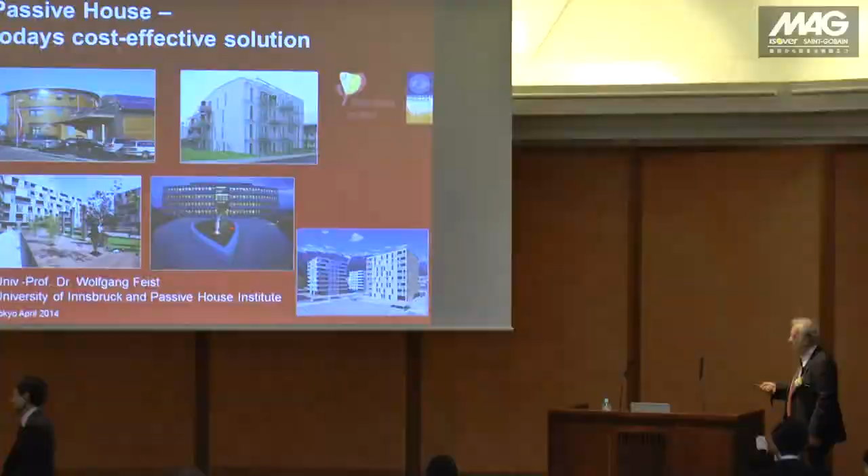I'm going to talk about the development of passive houses, which mainly took place in Europe. What you see in the first slide are some examples: passive house social housing projects built in Kassel and in Innsbruck, another project in Innsbruck, and passive house office buildings.

So there are already a lot of built passive houses which are being occupied in Europe.

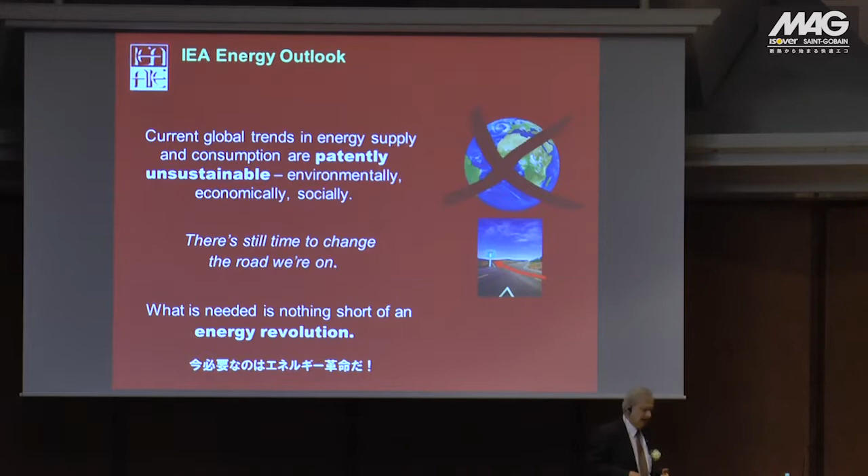This is information from the International Energy Agency, the agency responsible worldwide for research in energy resources and for looking at the development of energy worldwide. The IEA has always been in favor of the big industry model of energy—coal, gas, natural gas and oil. They publish what they call the World Energy Outlook every year, and there was a surprising result in the last one.

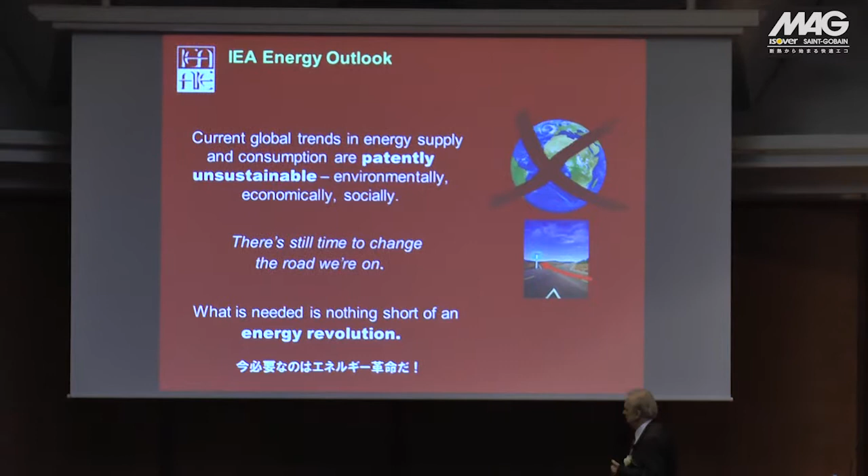This is what the International Energy Agency now tells us about the global trends in energy supply: they are patently unsustainable, not only environmentally, but also economically and socially. But they also say there is still time to change the road we are on, and what is needed is nothing short of an energy revolution.

So now let us have a look at how that energy revolution could look like.

In China they had energy supply problems all the time. In southwest China, all the region south of the Yangtze River, heating was prohibited, so people were not allowed to heat their buildings. But the comfort in these buildings was very poor—they suffered from very cold temperatures, down to 10 or 11 degrees during winter. So the government asked Professor Adamson for recommendations to improve the comfort in these buildings.

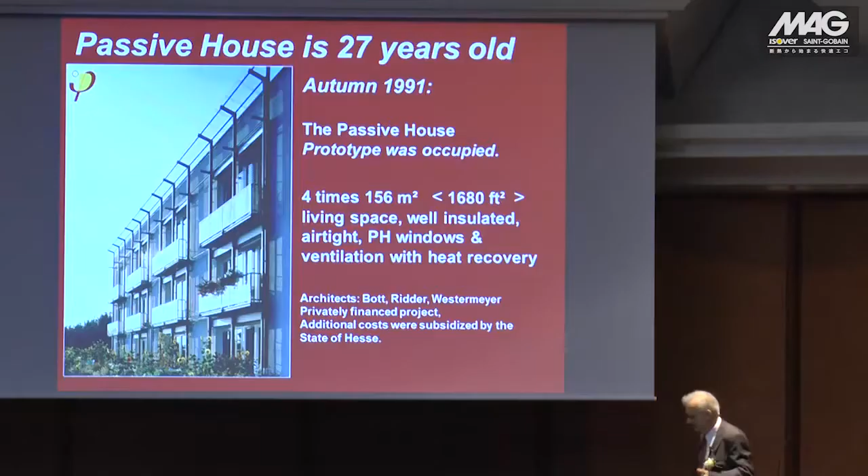So we made a theoretical study of how it might be possible to build passive houses in Europe. Professor Bo Adamson insisted that we not only do a theoretical study, but really build a demonstration building of a passive house in Europe. Now you have to know that in Europe the climate is like North Japan—it can be minus 15 degrees during winter. So it's not so easy to build a passive house in Europe. We had to use quite a lot of insulation, it had to be quite airtight, and we needed new hand-manufactured windows.

We put in a ventilation system with heat recovery. It was quite a big effort to realize these very first passive houses in Germany, in Darmstadt. What you see here is a typical German row house, with 4 units, each 3 stories, built by private investors. Families live in these buildings. This was built in 1991, and the architect of this development was Professor Bott.

Professor Bott, another colleague from the architectural department, later got a call from Stuttgart University, where he was teaching architectural arts, and that was the place where Miwa Mori was studying. So this is again some link to the Japanese development. This was the house being built at the

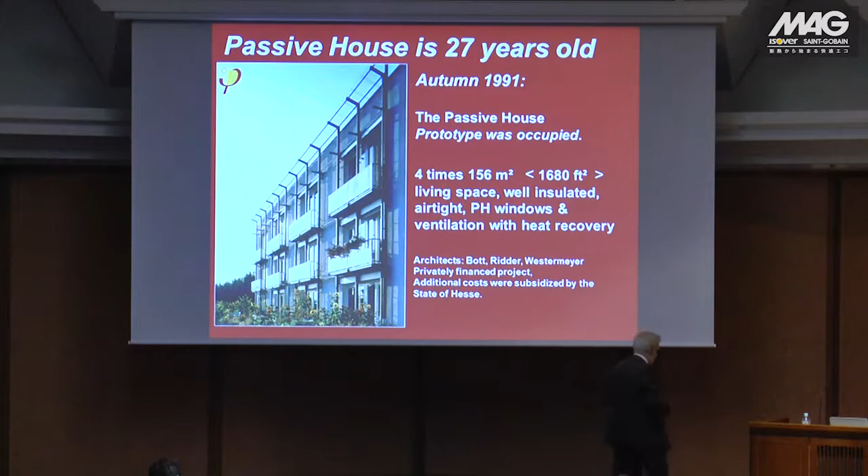beginning of the 1990s. The next thing we did, this was thought to be a research project. We wanted to know: will it be possible to reduce the energy demand of buildings in the cold German winter in a significant way? So we did that research.

We got some research money from a German state, the state of Hesse, to install monitoring equipment. We measured all the temperatures, we measured humidity, we measured the consumption of energy. And this is one of the most important results of that measurement.

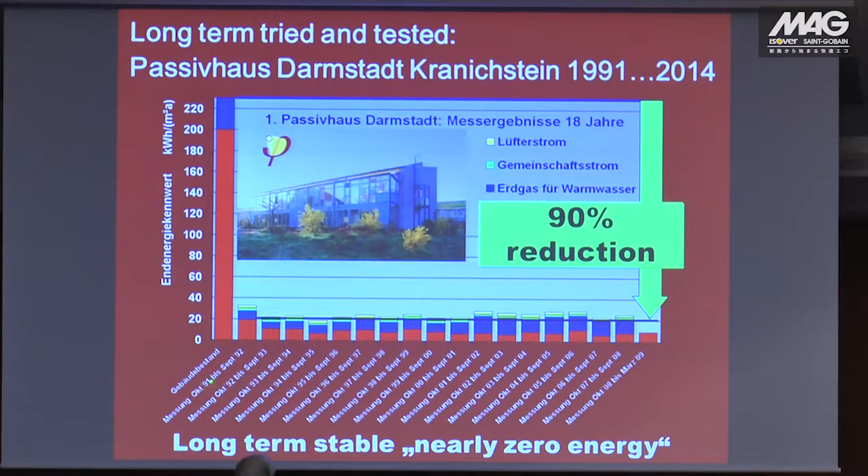What you see here is the years: 1991 to 1992, 92 to 93, 94, 95, 96. These are all the all-year consumptions, what is consumed in this building. Natural gas for heating, this is the red bar. Natural gas for domestic hot water. And this is the electricity for running washing machines and other things, and the yellow one for running the ventilation systems.

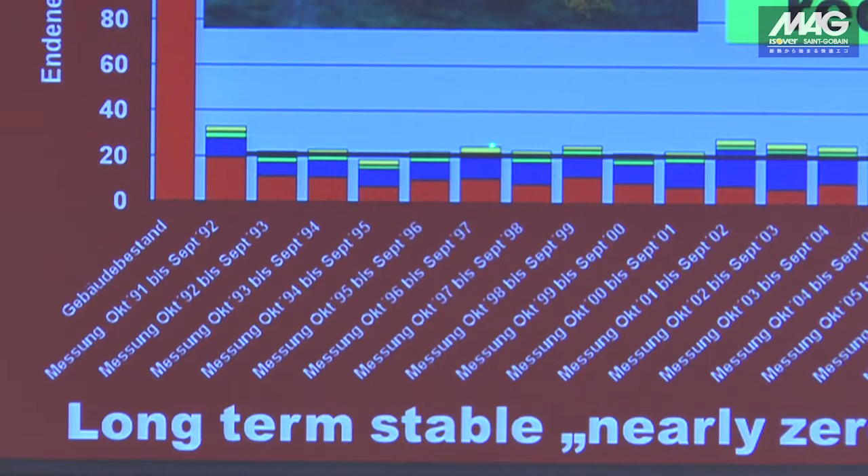So what you see here is that the total consumption of energy is in the range of 20 kilowatt hours per square meter and year, and the heating is even less than 10 kilowatt hours per square meter and year. Now we compare that with the average German consumption, what is normally consumed for heating in an average German building: 200 kilowatt hours. So this is down by more than a factor of 10.

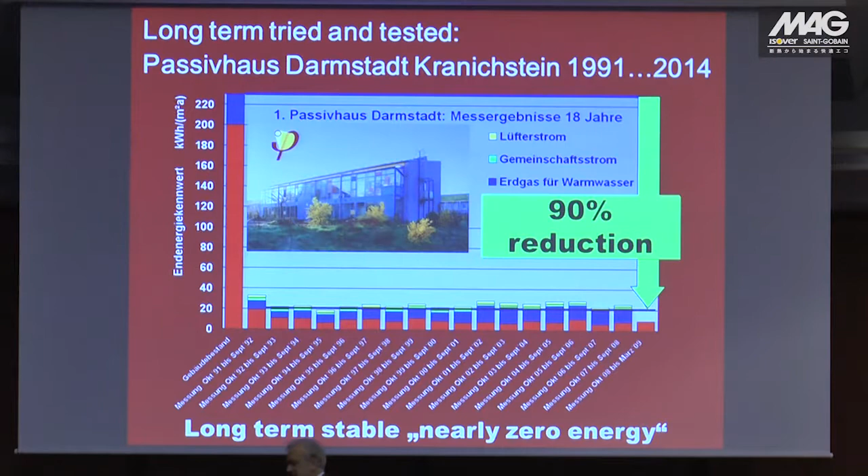So the whole research project was a big success. These results have been published, and then we had a very important guest from the United States of America. This is a guy you might know, he has been here at this university, I've been told, just a couple of months ago. His name is Amory Lovins. Amory Lovins came to visit us in this demonstration building.

After his visit, we were all sitting together having some afternoon tea, discussing the results. I was discussing with Amory, and at some point, well, you know Amory, he's a very energetic guy, and he told me, well, Wolfgang, you are completely wrong. So I was a little bit shocked. So now what's his opinion? Yeah, I'm completely wrong. So I was a little bit shrinking.

So what does he not like on this development? Well, Wolfgang, this is not just a research project. This is the solution. So I was very proud again.

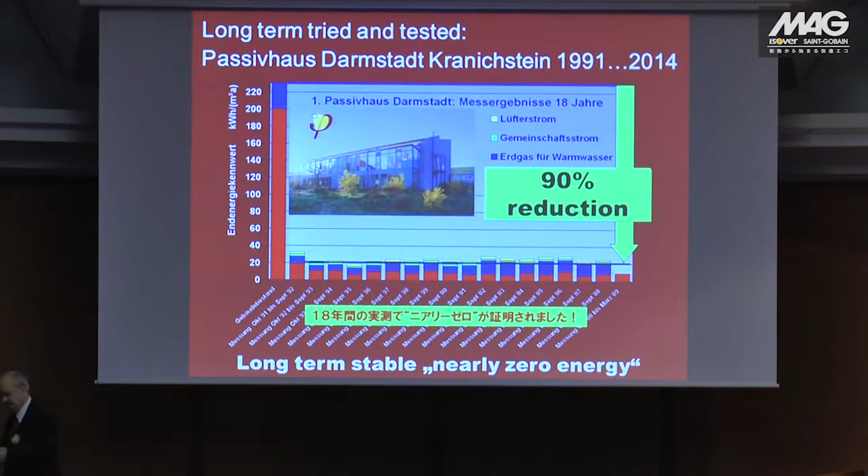He told us that now we should try to find producers to mass produce all these components which are needed in the passive house, like the insulation, the windows, the glazing system, the ventilation system. So all these parts needed to make a passive house work shouldn't be produced individually for each building, but in a big marketplace by different producers, and then the cost will come down, so with a reduced cost, it could be used everywhere. This was the idea of Amory.

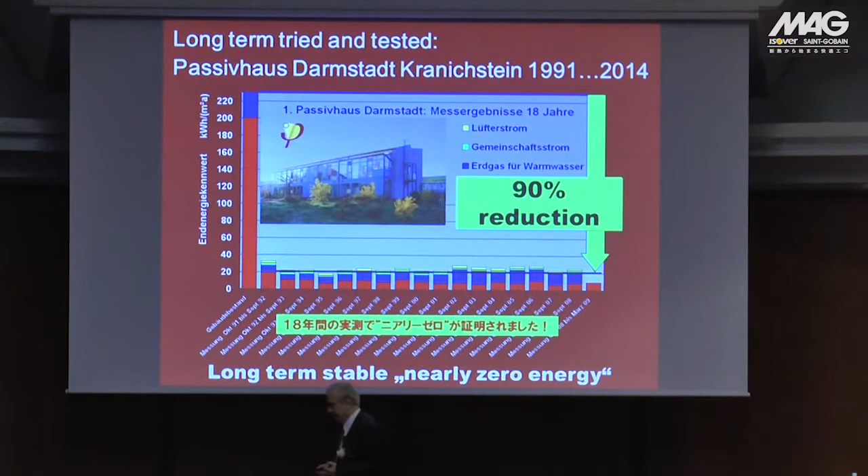And well, we started that. Again, we were able to convince the regional government, the Hesse government, and they financed a small working group of a few architects and a few producers in order to go on with the development of the so-called cost-efficient passive house. Well, and now I make a big jump. A big jump. We are now in 2013, last year, and I'll show you some examples of built passive houses.

This is what came out of the development. Now there are at least 50 passive house schools which have been built. A lot of social housing has been built as passive houses, because social housing has to be not expensive.

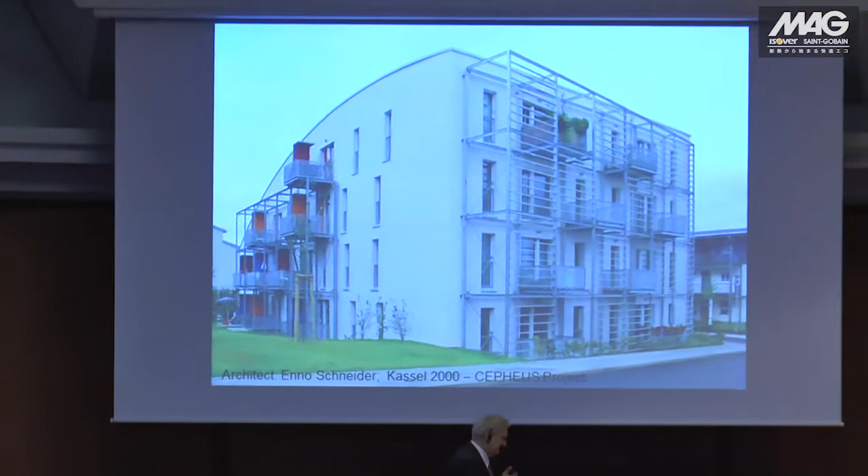So now you might be curious, if this is so successful, how does it work? I want to show you how this concept works using this example. This is another friend of mine, Professor Enno Schneider, an architect in Kassel. This building is the very first passive house social building, built in Kassel in the year 2000.

It's part of a big European demonstration project. The European Commission, which is the government of the whole continent of Europe, has research programs, and they started a program called CEPHEUS. CEPHEUS is an acronym for Cost-Efficient Passive Houses as European Standards.

And we have been working with the European Commission quite a lot. Now, when I tell you that the European Commission is somehow the government of Europe, you might be surprised, because who of all of you knows the European Commission? Yes, yeah, me, yeah, I know the European Commission. So how important is the European Commission? Well, it might be as important as the United Nations.

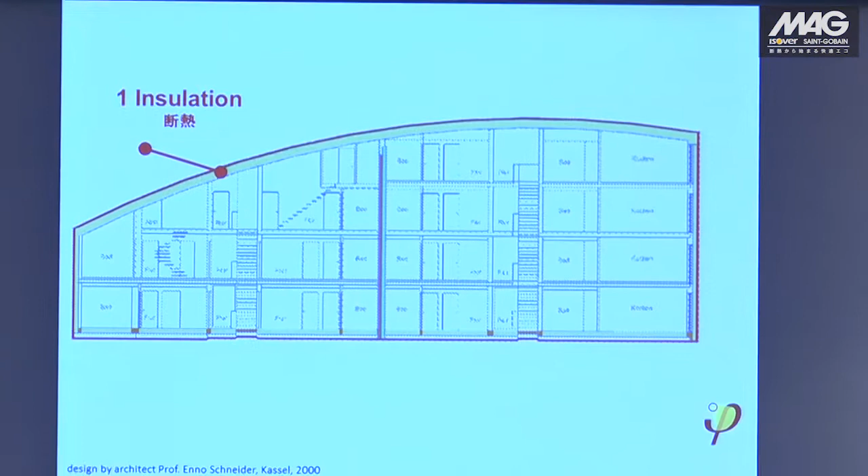So let's look at what the architect did in order to make this a passive house. Well, what we see first is insulation. It's a very simple thing to understand. If you want to keep your coffee hot, what do you do? Well, you fill it into a thermos bottle. This is insulation. You can keep the coffee hot without using any energy by filling it into a thermos bottle.

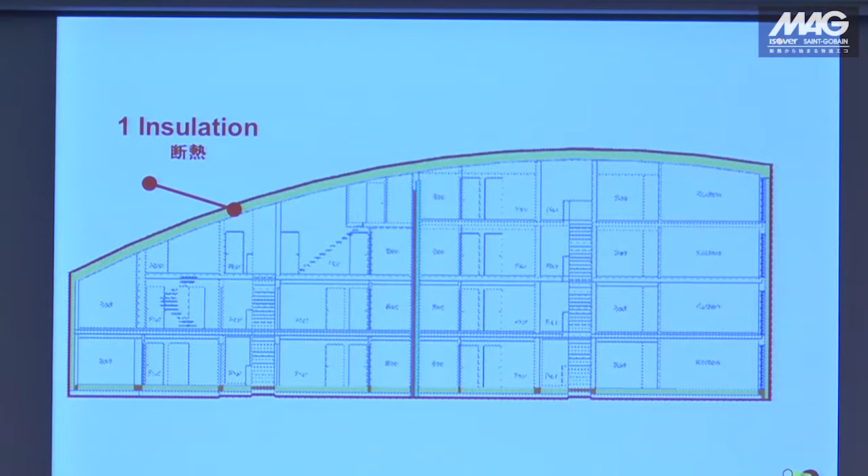And this is the principle of a passive house. You see, there are thick layers of insulation in the roof, on the bottom, in the walls. Everywhere there's not a window, we have very good insulation all around the building. So the building doesn't lose a lot of energy to the outside during winter time.

Now, there might be some questions some people ask: when you have that thick insulation, what will happen in summer? Will it be even warmer during summer because the insulation somehow is warming your house? No, that's not true. You have to think about it like a physicist thinks. If you want to keep your iced tea cold, what do you do? Well, you fill the tea into a thermos bottle, because the thermos bottle is keeping the tea cold. There's no energy going into the bottle.

So what is keeping you warm during winter is also keeping you cold during the summer. So the same material is useful for both the summer and the winter condition.

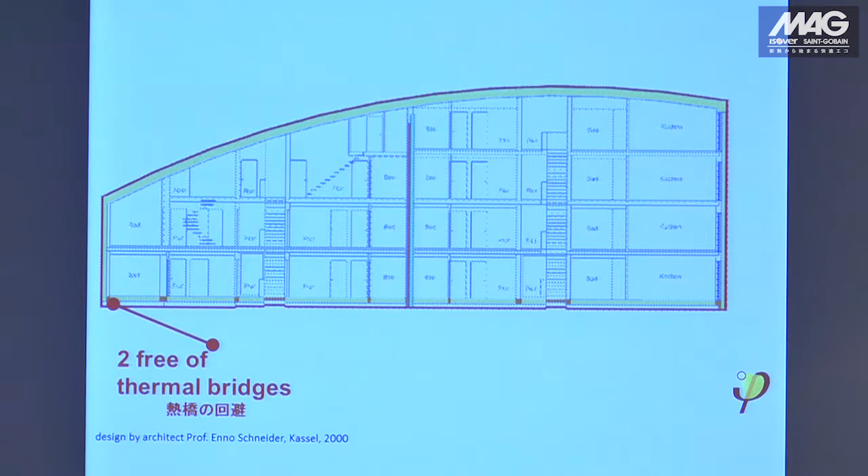Now, insulation is very important for the passive house, but it's not just insulation. We also have to be very careful that all parts are insulated well. There are parts of a building which we call thermal bridges, points where the insulation might be weakened by concrete or steel or other materials going through the insulation. So we have to reduce these thermal bridges. This is also part of the passive house concept.

The third part is the passive house windows. Now, what is a passive house window? It's a little bit dependent on which climate we are in. In the German climate, which is very similar to North Japanese climate, the optimal window is a triple pane window.

A triple pane window with two low-E coatings loses only a very small amount of energy, so we have almost no energy losses, but we still have energy gains from solar radiation. This triple pane window is the best solution for moderate cold climates.

If we go to even colder climates like northern China or Siberia in Russia, we need even better windows. The best available windows nowadays are vacuum insulation windows, using the technology of the vacuum flask for the window. But in northern Japan, it's still a triple pane window.

If we go to the south of Japan, where it's very hot and you mainly want to protect from too much energy during summer, a sun protection glazing is the best solution. So the kind of glazing you use is different depending on the climate you are in.

So that is the passive house window. Now, of course, the building envelope is not only insulated, it also has to be airtight.

Well, why? You might have seen this, and it's very easy to realize, especially in hot and humid climates. During summer, in old houses, you very often have a problem of mold growth inside the building structure, because humid air infiltrates through the structure and there might be condensation, which causes mold growth and structural damage to the building. This is why a building envelope has to be airtight, in order to avoid structural damage.

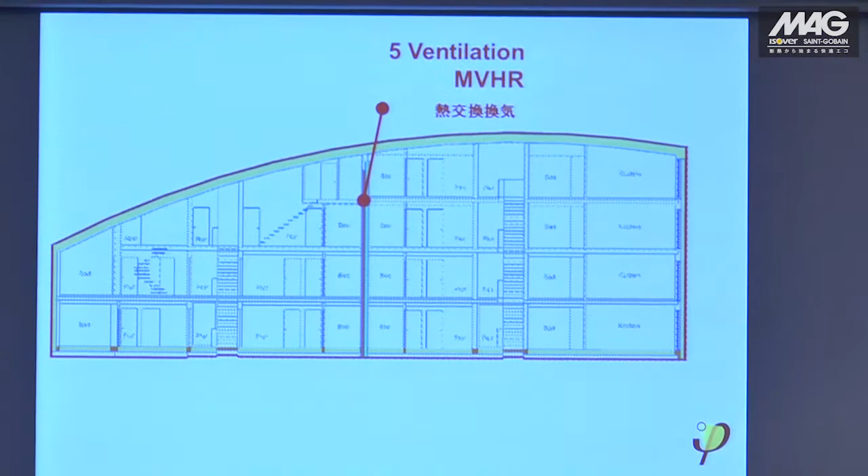There is a fifth point: people in a building need fresh air, so it's not an option to just seal up the building to make it airtight. We need fresh air in the building. So fresh air is provided by ventilation with heat recovery, MVHR, or as it's pronounced in America, the heat recovery system. Fresh air is delivered to the building and exhaust air is removed from the building — mechanical ventilation with heat recovery.

So these are the 5 elements of a passive house, and they are the same everywhere. These are the same principles used to build passive houses, which are very successful. The surprising thing is that these are the only 5 points — nothing else. It sounds too easy to be true, but it's just 5 well-known elements: insulation, better windows, airtightness, reduction of thermal bridging, and ventilation with heat recovery. It's a very simple principle, and that's the surprising thing — it really, really works.

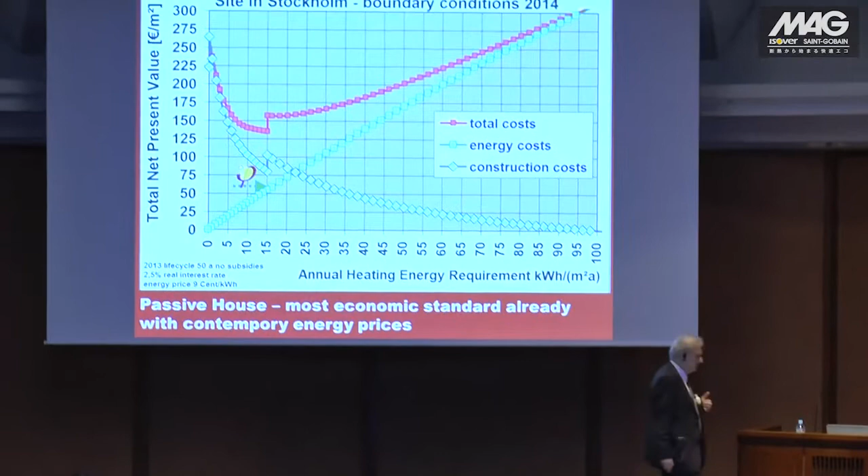Now there's a lot of discussion about cost. I've heard it's also discussed in Japan — we talked about it before the symposium — that there are lots of people who think passive houses have too high an upfront cost. Let's be honest about these developments with cost.

What I have here is the amount of energy needed just for heating the building. Let's look at heating for now. You can have 100 kilowatt hours per square meter per year, or you can build a zero energy building which doesn't need any heating at all — that would need about 1 meter of insulation. Now, to reduce the energy you need, you have to improve the insulation — maybe 5 centimeters, 10 centimeters, 30 centimeters, or up to 1 meter of insulation.

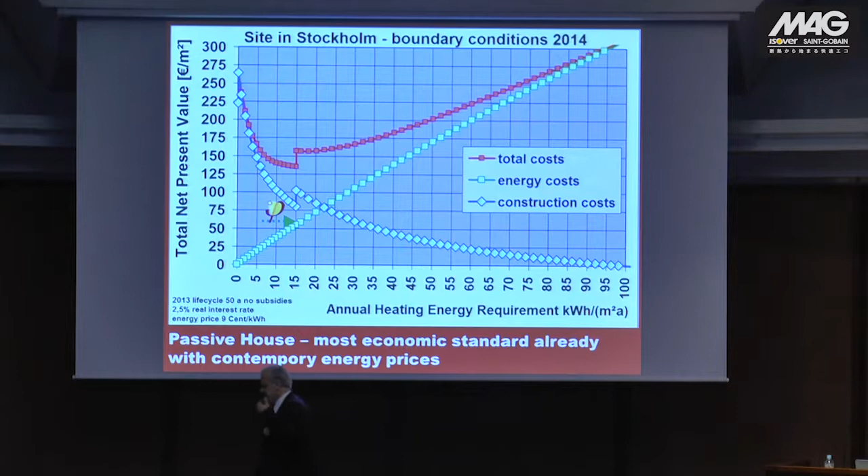So the overall cost for insulating is increasing. This isn't just the cost for insulation — it's also the cost for the windows, the ventilation system, everything included. So the costs increase a lot. What you see here is that a zero energy building, one that doesn't consume any energy, might not be a good idea because it's really very, very expensive.

But on the other side, building a poorly insulated building has its own downside: the heating cost. Here we have the heating cost — of course it comes down as insulation increases. We have the highest heating cost with a less insulated building, and zero heating cost with a zero heating energy building. This is the total amount of heating cost over the whole useful period of the building, calculated the way a bank manager would do it.

So it's calculated by calculating the so-called net present value. There might be people in this room who don't know what a net present value is.

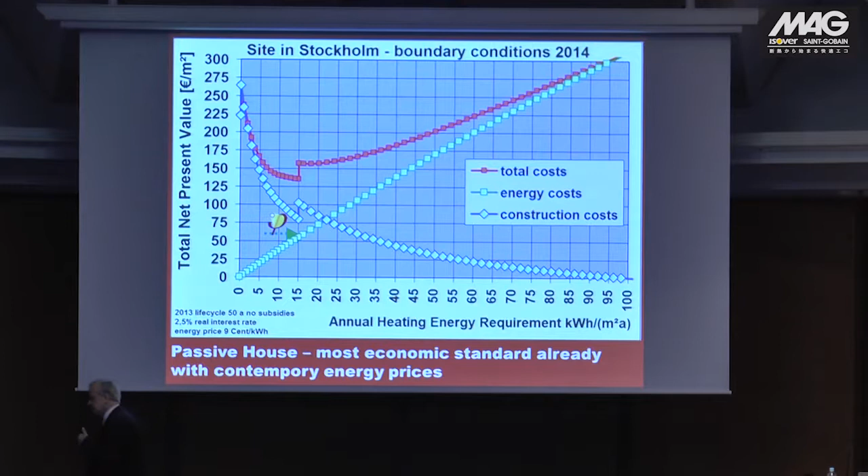Just think of it as the total amount of cost you have for paying for the energy. It's what the financial sector uses for comparing costs which occur at different times, so the costs in the far away future.

You don't care so much about the cost you will have in 20 years. So these costs are not as valuable nowadays, they don't have such a high net present value as what you spend now.

So this is added up exactly how the financial sector does it. This is the green curve, the net present value of the energy cost.

Now there are no other costs, well there are costs for say maintenance, yes of course, but the maintenance costs are about the same in both cases, whether you insulate or not.

Even the maintenance cost might be lower in a well insulated house, but we won't take that into account now. Now these are all the costs, so we can add them up.

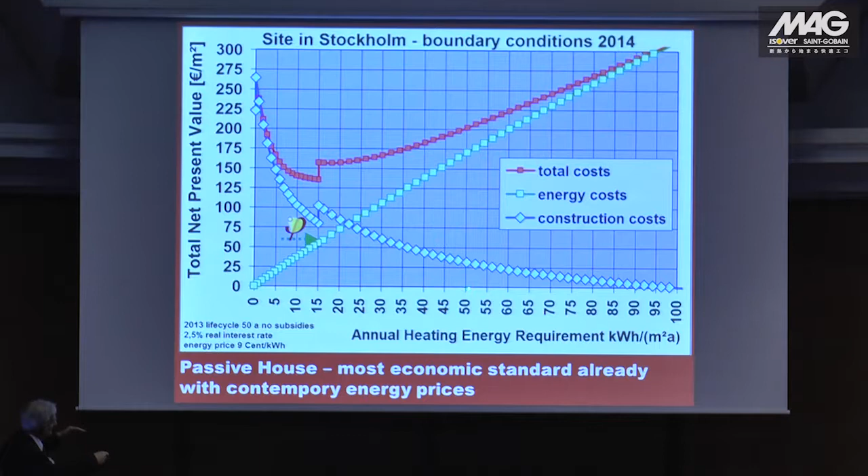We add the investment cost and the energy cost, and what you find is the red curve. So the red curve, this is the total cost.

This is what somebody who is a resident in this building will have to pay. That is the total cost of occupation in that building.

And what you see now is that there is a minimum. And this minimum is exactly the minimum of a passive house. So the passive house is at the minimum of total cost for the overall spend in such a building.

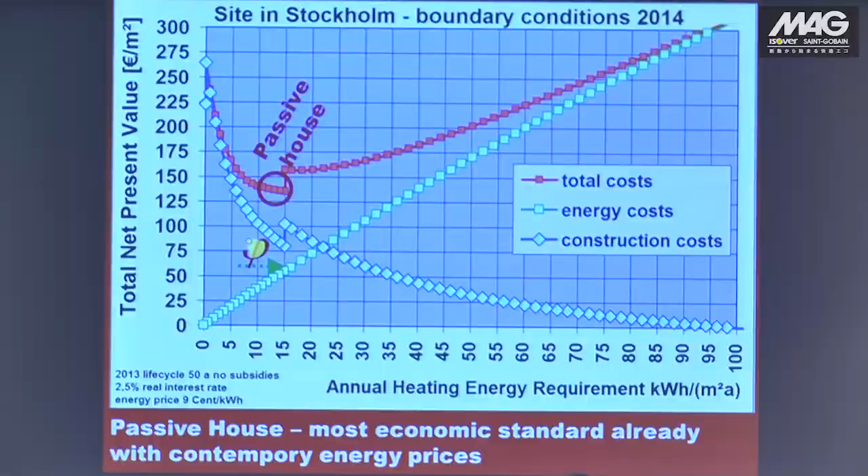And this is quite easy to understand also for all those who are going to build new buildings. This is the best way to do the investment you take. You'll have a loan, you will pay interest for that loan.

And you can compare the paid interest and the payback with the energy you are saving. So this is why the passive house is a very attractive solution, because it's the least cost solution for building new construction in Germany nowadays.

I'm coming back to the 5 points. What are the important design methods for building a passive house?

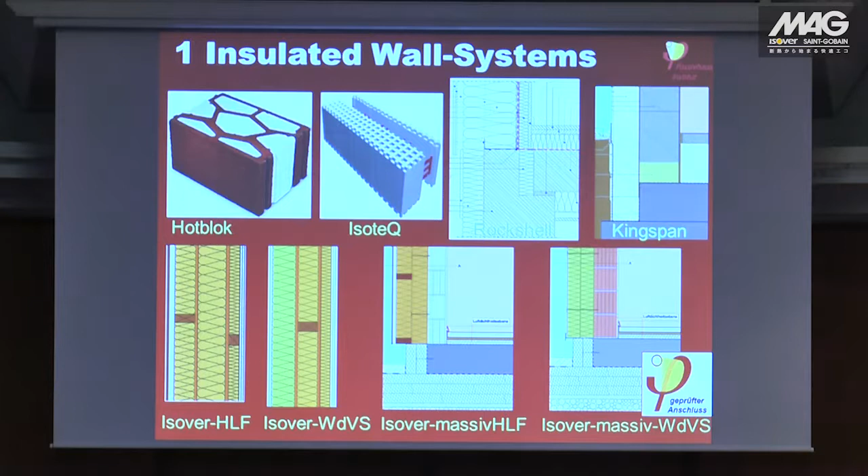I come back to what Amory Lovins convinced us to do. Nowadays we have a lot of different producers who offer passive house construction systems in Europe.

So this is a type of just a simple brick, insulated brick structure, which is distributed by the brick industry. So the brick industry has passive house bricks. This is a method you can use, concrete structure, in order to build passive houses.

It's a so-called insulated concrete form, ICF in America, very popular. So you build, this is like Lego, so you build your building like with Lego stones.

And it will be filled with concrete, and these are the forms, and the forms will be kept in place, so they are not removed, they don't have to be removed from the site or destroyed.

So this is also environmentally quite an interesting development. There are lots of other producers who produce these passive house elements.

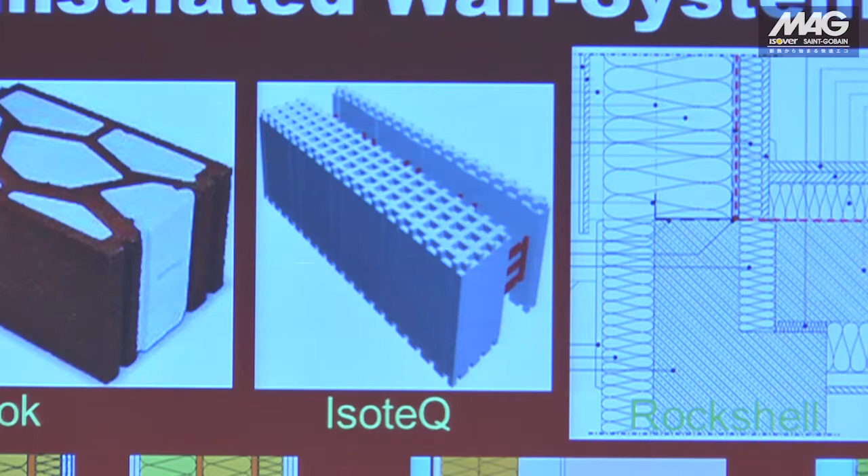This is another construction type which is much more popular in Japan, that is timber construction. So there are different ways of timber construction filled with insulation material.

So one type of insulation material you can use in passive houses is the glass wool insulation or mineral wool insulation. There is a probe you can see in the exhibition outside, produced by Isover, by the firm MAG.

Which has been helpful in organizing this event also. You can also, of course, use other types of insulation.

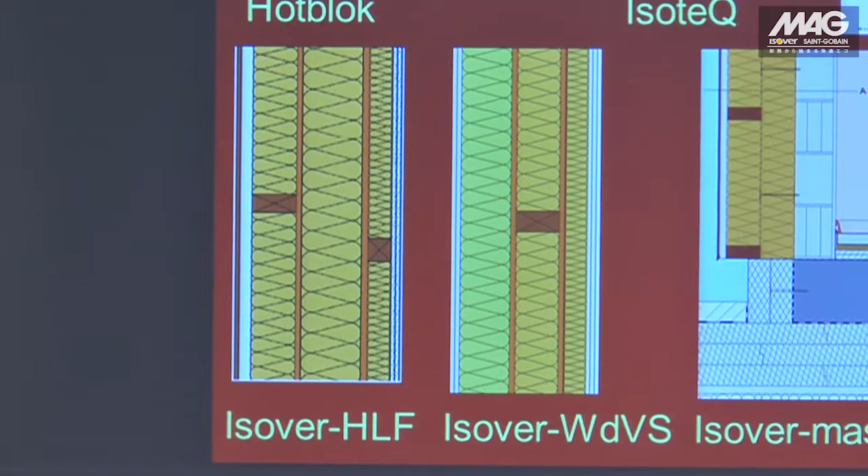There are lots of different types of insulation available. What we have to keep in mind is that normal insulation material is mainly just air.

It's just air, what is insulating, like our clothes. It's not depending on what kind of material you use to keep the air from moving. If the air is moving, it's not insulating, it's convection.

So then this is a bad idea. The air has to be kept in place, and this is where the insulation material comes in. So these are the solutions which have been created for the structure of a building.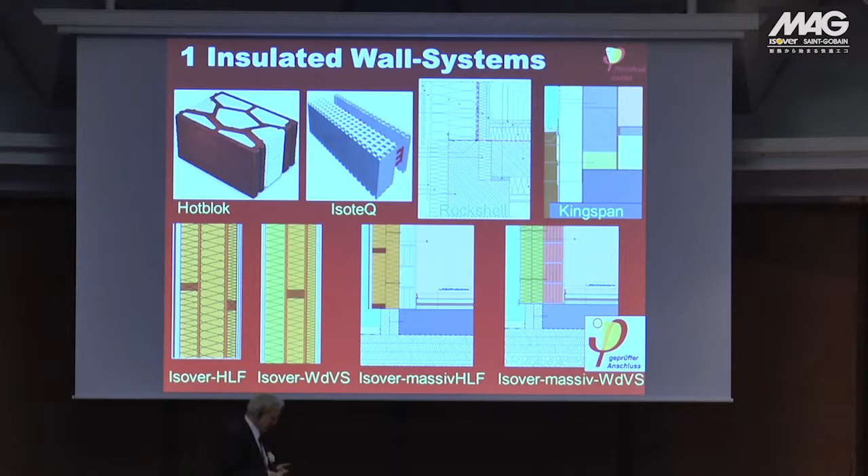Now there are already more than 100 producers in Germany. This is again what the speaker before me told you. This is a big development of small and medium enterprises providing materials which save energy. So this is a big shift from big industry - oil, gas, coal, and nuclear - to small and medium enterprises who construct energy-efficient buildings.

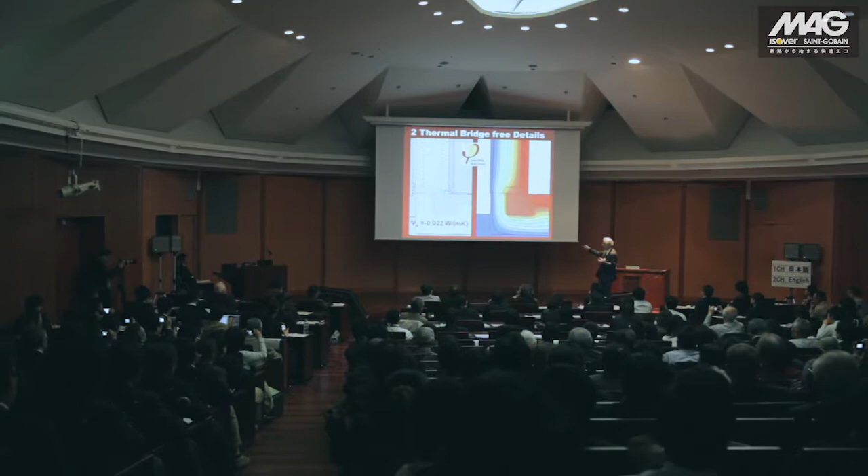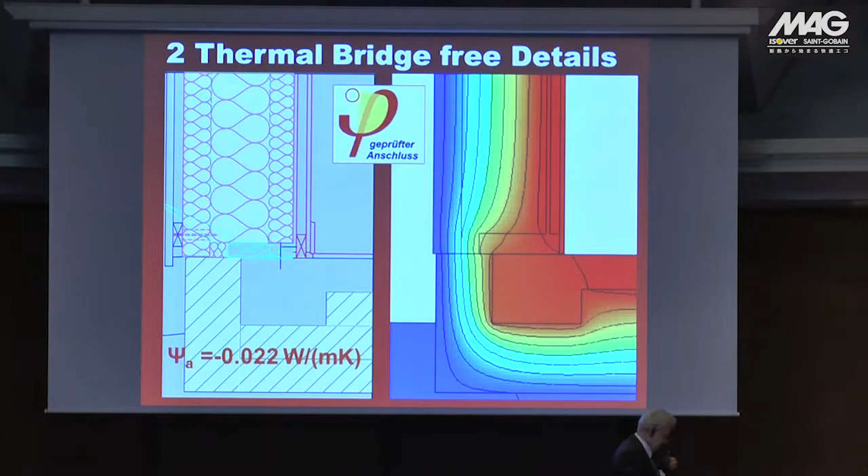So what is our role in this? We help these producers design their solutions. This is a type of timber frame construction widely used in Germany. This has to be connected to the insulation of the basement. What you see here is a specific structure, how to make that join in a way that there is no extra thermal bridge. The thermal bridge is eliminated from the whole envelope, and this is possible just by using your brain. We are substituting energy losses by using our brain to construct better construction. This is widely being used.

Let's go to step 3. You remember, I showed you 5 points for construction of passive houses. Now we have seen insulation and reduction of thermal bridges. I'm going to show you the solution for windows.

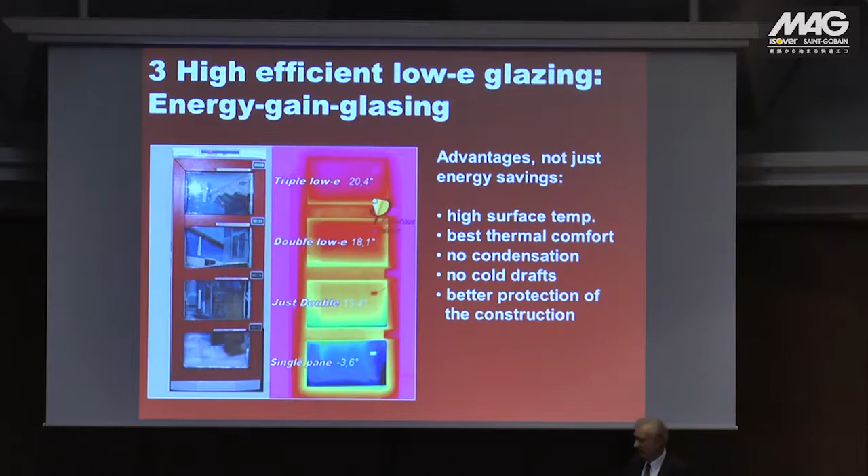Now we are in a cold climate. You see outside it's a winter condition with snow, minus 15 degrees. Inside it's 22 degrees. That sounds comfortable, but let's look at the window. This is a standard single-pane window, which will have frost on the inside with minus 15 degrees outside. It's not comfortable at all - if you put your hand on it, you will freeze.

A not very comfortable solution. The next step was to just add another pane, so we are at a double pane window, which is better. Now the temperature on the inner side is higher, above frost, but you still have condensation, and 14 degrees is still not very comfortable.

So the next step was that physicists brought in what is called a low emissivity coating. This is a very inexpensive industrial process to coat the window with a small metal layer reflecting infrared light - like in a thermos bottle. This gives a much better window, with a surface temperature in the range of 18 degrees. This was the type of glazing mainly used in new construction in Germany up to the last 5 years.

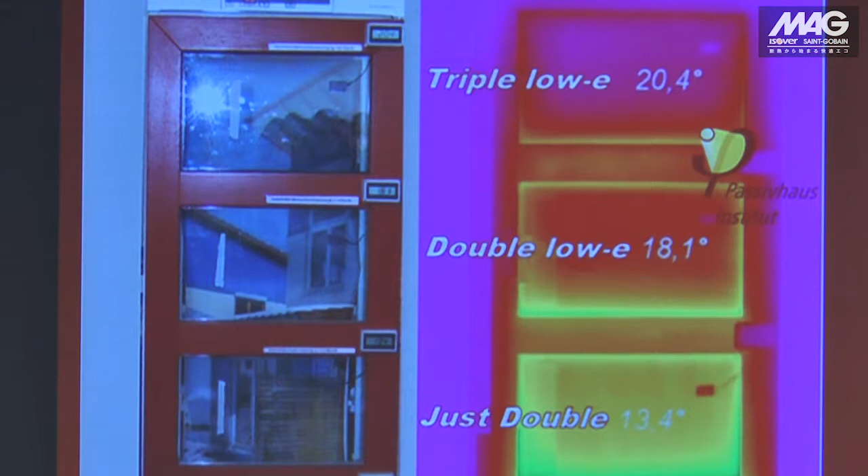Up to 2009, 2010, this type of double low-E window was the mainly used window in Germany. And what happened then? Now 70% of all glazing used in Germany, in new construction and refurbishment, is already triple glazing. Triple glazing, you just add another pane also with a low-E layer, and now we are down to a very low heat loss and up to a very comfortable surface temperature.

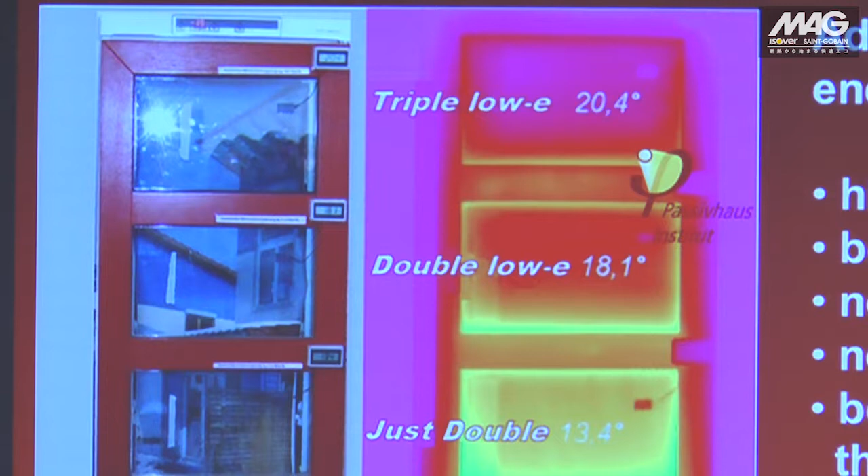If you put your hand on the surface, it's 20 degrees - as warm as your desk. This is not cold anymore, a very comfortable situation. The prices of triple glazing have come down very much in Germany, so nowadays it doesn't matter. In some parts, if you want a double pane, it will be more expensive than triple pane, because triple pane is now the standardized mass product solution.

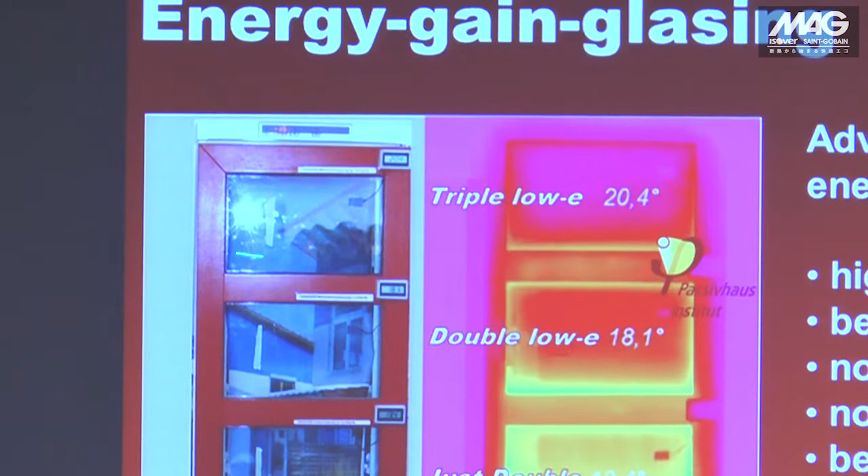So Amory Lovins has been exactly right. If you go to produce these elements as the normal solution, it's not going to be expensive. And this is what happened.

Now it's not just the glazing. The glazing is produced by centralized industrial fabrication, like the company Saint-Gobain, for example, which produces glazing. But there are others like Pilkington and Schott Glass - lots of producers of glazing, but it's produced in a centralized factory. What is locally produced is the frames, like this typical German wooden frame which has been used most of the time.

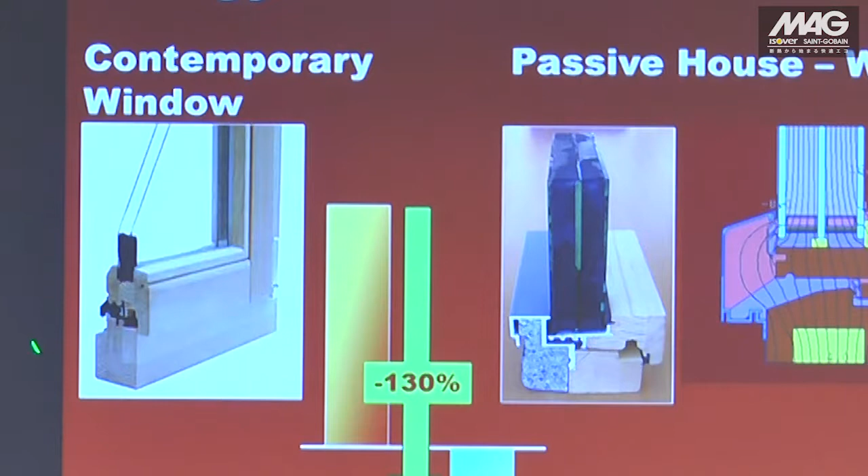So if you have this old window with a normal frame and a double glazed pane, it is a heat loss window. We have a lot of energy losses from the window.

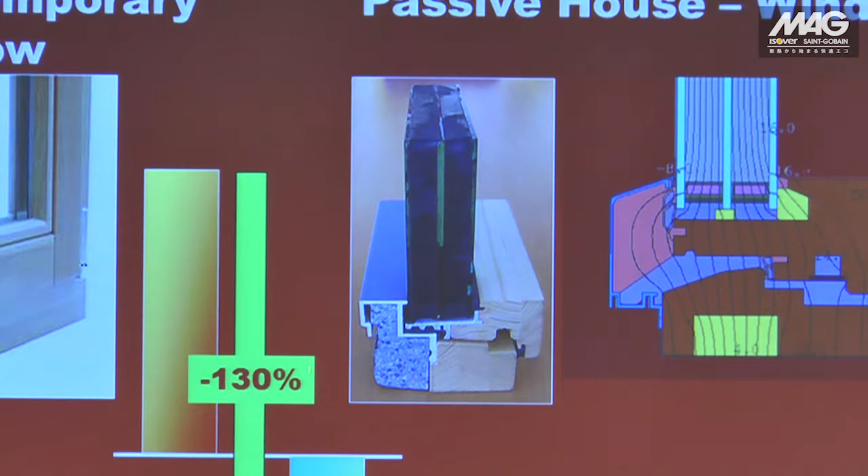Now, what we did in the development of the passive house sector, we moved the frame around, so now it's positioned in a way that's much slimmer than the old one. We added some insulation on the outside of the frame, so now this is a very well insulated frame. And this is a triple pane glazing with a thermally insulating spacer. So what we get at the end is a window where it's no longer a heat loss window, it's a heat gain window.

We get more solar energy into the room by penetrating through a window from the outside with solar radiation, so that the room gets heated during winter by the solar energy, and the heat losses are smaller than the heat gains. This is what took place in the passive house revolution, part of the energy revolution in Germany.

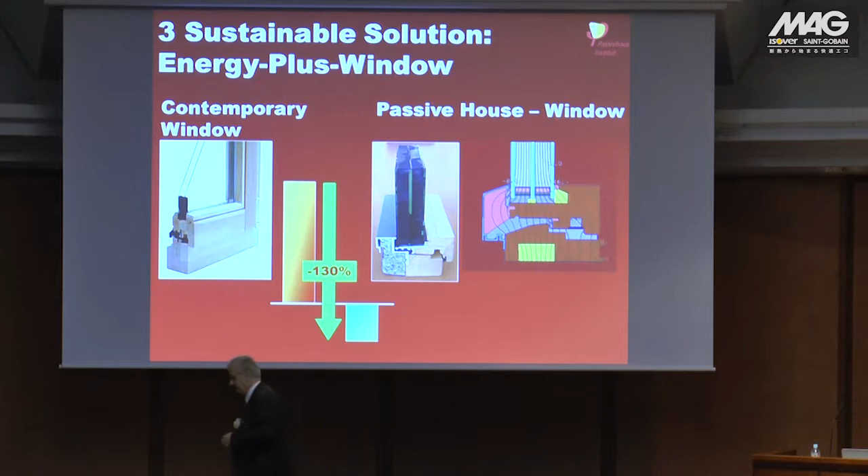So this is going to be the window of the future, and hopefully when I'll be here next in Japan, that's a condition - I'll come back to Japan only if there is a Japanese-produced passive house window. We'll need a passive house window from Japanese production.

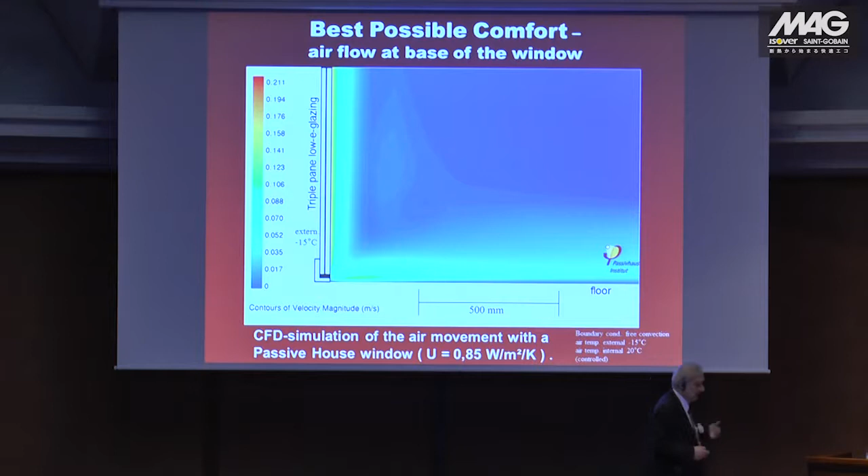So there's another advantage to these better insulating windows. The window has a cold surface, so at the cold surface of the window, the air is cooled. The cool air falls down along the window and distributes on the floor, so you get cold feet. You might know that from your home, that there is cold air coming down. Now, if we have a passive house window, the temperature here isn't very low, so you won't get any cold feet any longer. So the comfort in a passive house is much better than you are used to in standard buildings. It's another advantage.

So now I'm coming to point number 4. I won't talk a lot about airtightness because I already told you what is important, why we need a building envelope to be airtight - it's mainly to avoid structural damage. I'm not going very deep into that. But the next step is what always has been a discussion everywhere.

Why do we need ventilation? We have a lot of emissions in a dwelling, and it's also us - we give off smells and humidity, and there's a lot of activity going on in a room where people are staying. And this is the reason why we need ventilation.

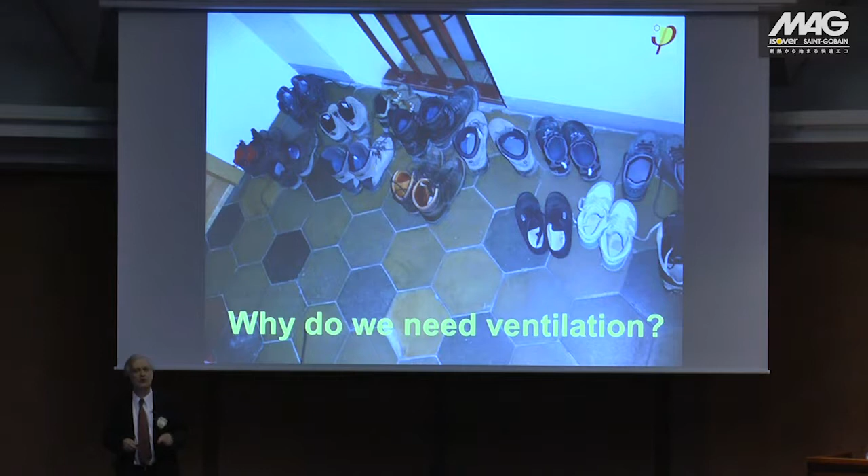So ventilation is clear, it's for indoor air quality. This is the main issue of ventilation. Ventilation is about indoor air quality. And I say it again, ventilation is about indoor air quality. It's not about energy. Yes, we can also improve ventilation in order to save energy, but that's not the important thing. The important thing is ventilation is for indoor air quality. This is why we need ventilation.

And this is how it's done. We have fresh air - this is air coming from the outside - and the fresh air is distributed into each dwelling. So now let's look at that dwelling. This is fresh air which is ventilated into the room. We have the same thing here, of course - in this room where we are sitting, in this conference hall, there are fresh air supply outlets because we need fresh air inside here.

So this is distributed to the living room, to the bedrooms, to the working rooms, everywhere where people are staying. And then there is the stale air, the air which is coming from the kitchen, from the bathroom, from the toilets, maybe a workshop or whatever. We remove the air, we extract it from these rooms where we have the poorest indoor air quality and bring it back outside. This is how ventilation works: fresh air in, stale air out.

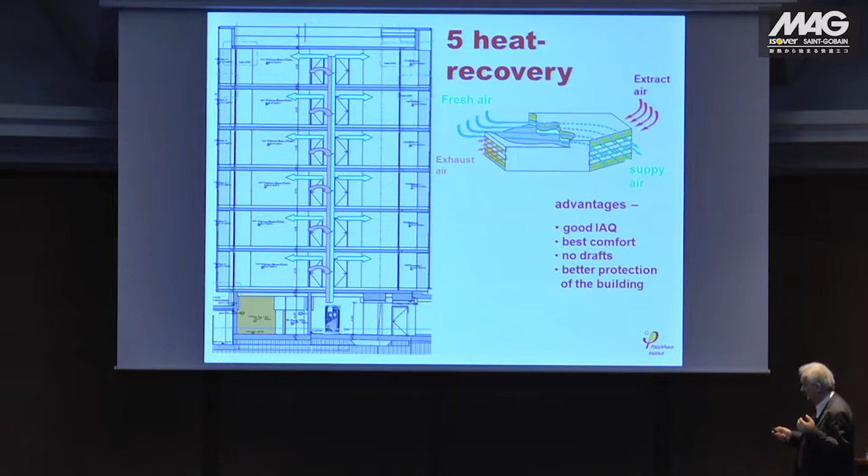Now the only trick with passive house ventilation is that we put in something which we call a heat recovery system. How is that working? Well, this is what you see here. This is the extract air, the warm air coming from the kitchen, from the bathroom, from the toilet. We bring it through the heat exchanger, and it's removed outside of the room.

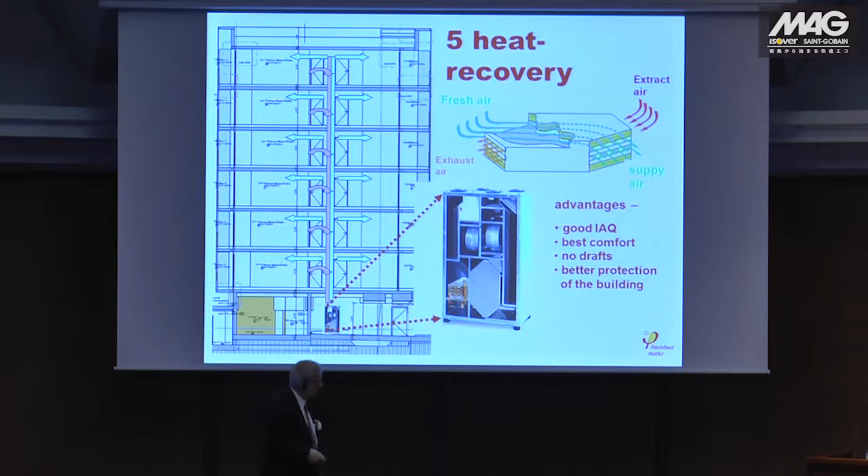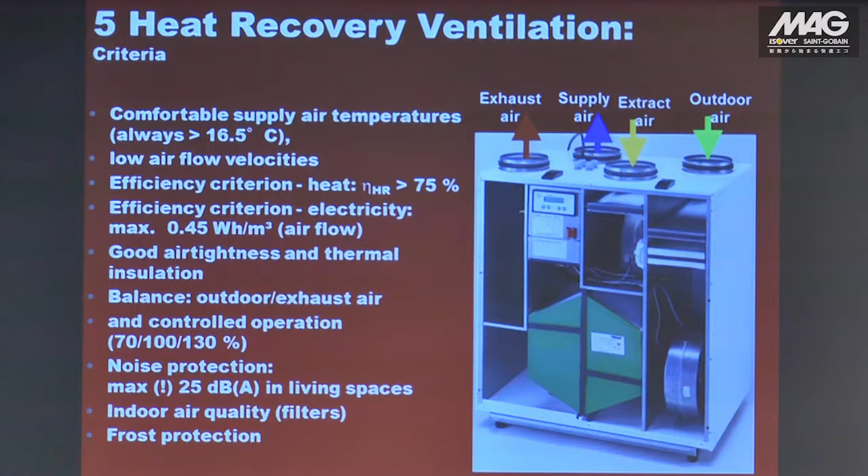Think about a piece of paper between the cold, fresh air coming in from outside and the air supplied to the inside. These airflows are not mixed up - there's no return air, only fresh air from the outside. But we exchange the heat from the warm air to the cold side. With modern heat exchangers, we can have efficiencies of up to 90%, bringing back 90% of the heat from the stale air to the fresh air. This is such a type of heat recovery ventilation system.

Remember what I said - ventilation is about indoor air quality. So there are a lot of issues such a system has to account for. They have to provide good indoor quality, so they shouldn't smell. There have to be filters so you don't bring dirt into the room. These ventilators don't have to produce a lot of noise - it has to be quiet because you don't want to hear something all the time. So there are a lot of criteria for this system.

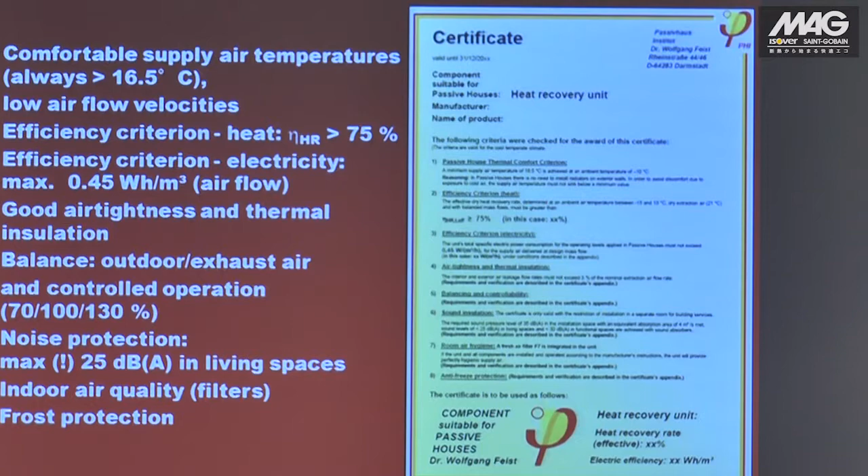This is another area where our institute is engaged - we do certification for these kinds of systems. You can get a certificate, and in this certificate you find all the numbers: how high is the efficiency of the system, and if you install it in your building, it's the installed efficiency. This type is 75%. How high is the consumption of electricity for the ventilators? What is the operating noise? You get all these numbers, and you can be sure that the product will meet these numbers.

So you can really use it in your dwelling in order to save energy and have good indoor air quality. So I'm now wrapping up - I have been talking about better insulated wall and roof systems. There are a lot of these systems now available on the European market, and yes, we need more of these systems, especially in Japan, we'll need a lot of these construction systems.

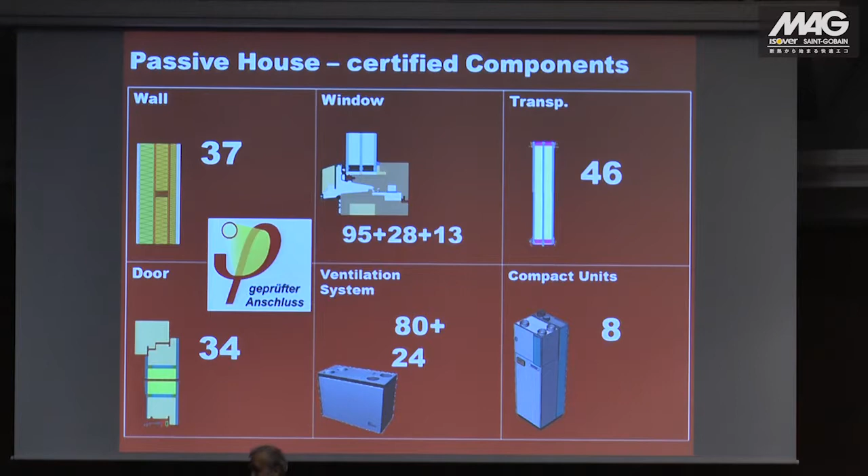The better windows - nowadays we have, this is an old slide, more than 150 certified window producers, most of them small and medium-sized producers. These producers can compete with the big plastic window producers in Germany because they have such high quality. This is a big chance for small and medium enterprises. So this is not only good for energy, not only good for changing the energy path, what IEA says, it's also good for the economy, because small and medium enterprises are the people carrying the economy. Those are the people who are innovative, who can help us grow the economy.

There are a lot of window panes available on the European market. I'm very proud to announce that now there is a first Chinese-made passive house window - there's a certification for a Chinese-made passive house window. And hopefully soon there will also be Japanese-made passive house windows available for the Japanese market.

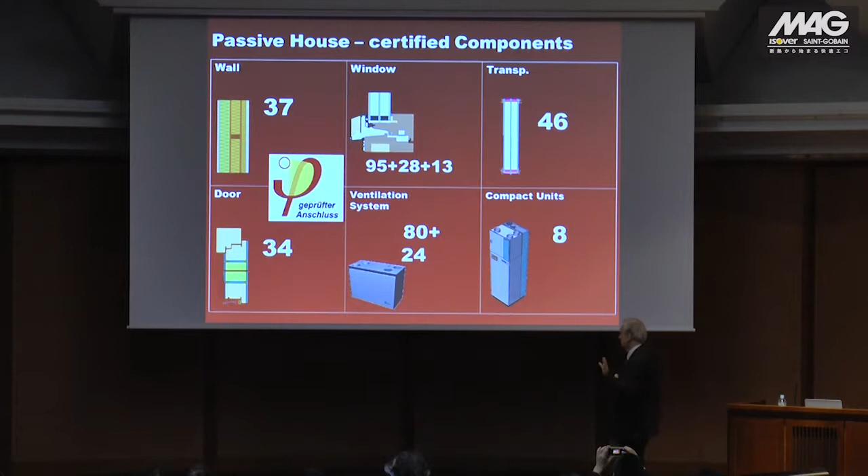We have these heat recovery systems - nowadays more than 100 systems have been certified. This is also a product which can be easily produced by small and medium enterprises. They use efficient motors which are constructed by mass production of bigger industry partners producing very efficient ventilator units.

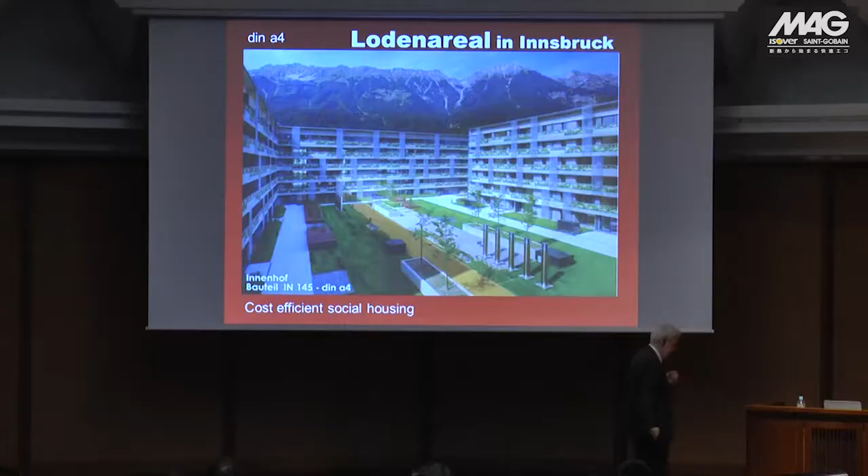I'm now going to show you, in the end of my presentation, a little bit less demanding - I'll just show you some examples so you keep in mind what we can do with this type of technology. This example you have already seen on the first slide, but now a big picture of it. These are some 350 social housing units built by a company in Innsbruck - the biggest construction and investor company there, building social housing. They built that in 2004. Some of you have already visited this settlement.

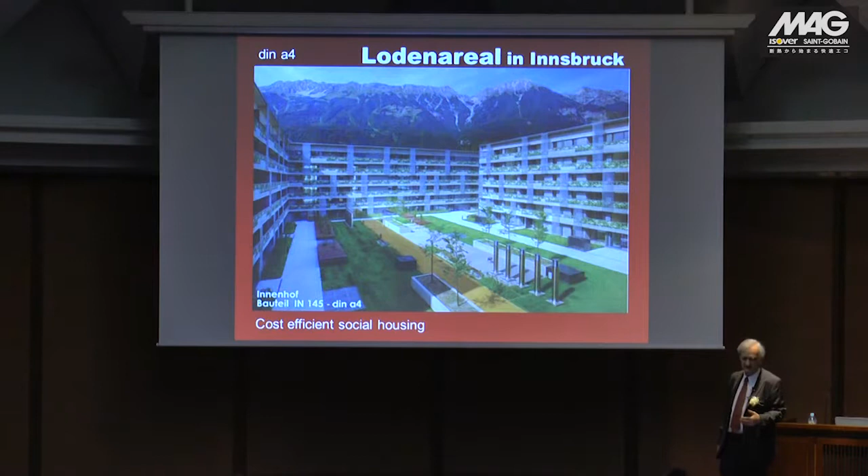Bolzano is the capital of the South Tyrolean state, a state in Italy. They wanted to refurbish this building, so they made a competition where they invited a combination of a constructor and an architect to bid for the refurbishment. It should be refurbished and there should be 2 more floors added. The investor is the Ministry of Energy of South Tyrolean state.

They gave the contract to one bidder, organized by architect Michael Tribus, who made the cheapest bid. He didn't tell them he was going to build a passive house, because if they had known, they would have said, 'Let's remove the extra insulation, it will be even cheaper.' But he didn't tell them, so he made the cheapest bid, including the passive house.

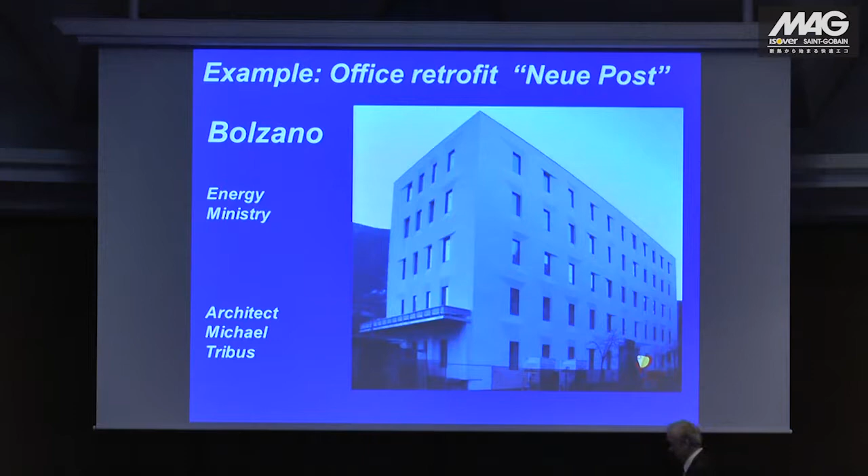Now the South Tyrolean energy minister is very proud to have a passive house, which is very comfortable and uses a very small amount of energy. So how can we do all this development?

There is a key method for designing passive houses: when you design one, you try to keep the energy balance in mind. This is something physicists and engineers do, but most architects don't like to calculate their energy balance during design. That's why we created a tool called the PHPP.

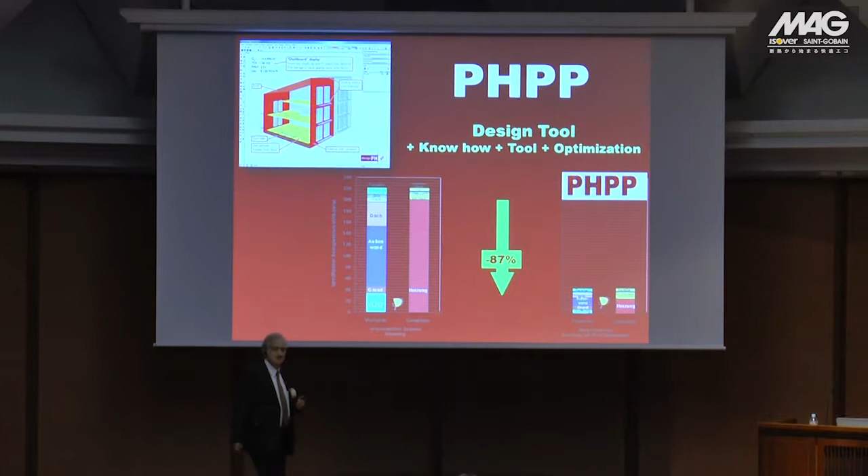What is PHPP? It's the Passive House Design or Planning Package, a package of software where you do the following. Who here is an architect? Oh, there are more architects there. You know SketchUp? Every architect knows SketchUp, so you do your first draft using SketchUp.

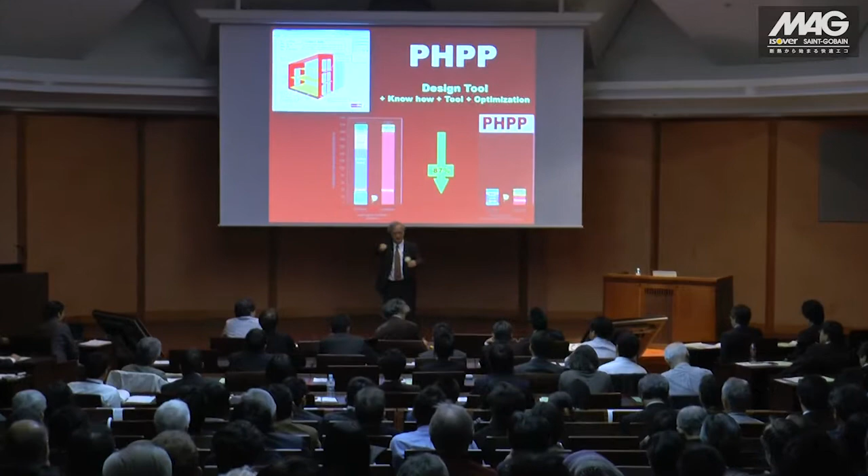It's very fast. You just have a drawing and put it up, and do your first draft using SketchUp. I also tried it myself - I'm not an architect, I'm a physicist, so I'm not used to such tools, but interestingly this is fun, really fun to build your building with SketchUp. It's very fast, just 5 or 10 minutes and you are at that place.

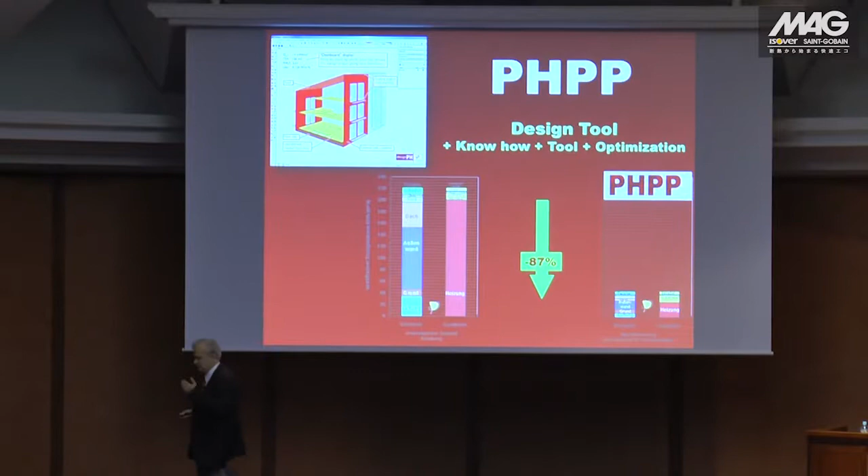Now there is software which identifies your windows, the walls, the roof, and so on, and it's very accurate in identifying it. There may be some mistakes - maybe it calls a part of an outside structure a roof - and you have to correct that, but it takes only 2 minutes to correct this identification.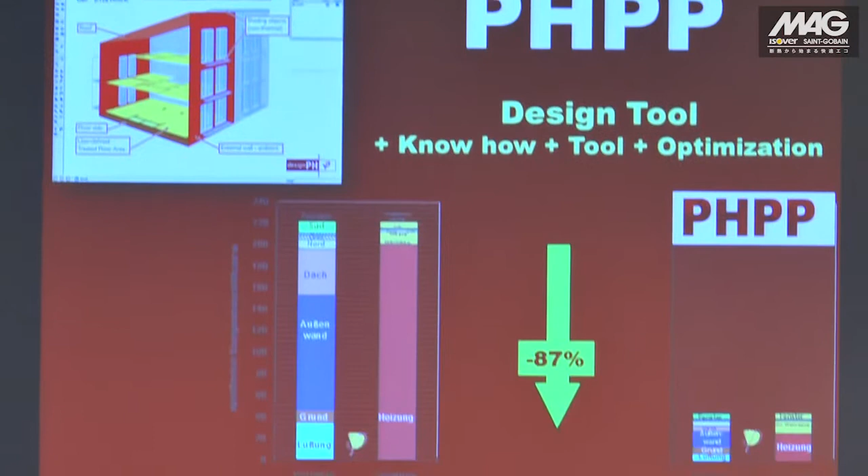With one more click, you import all this data into the energy balance calculation. The energy balance is calculated and you get your result - this is your heating demand. Oh, that's too high, much too high.

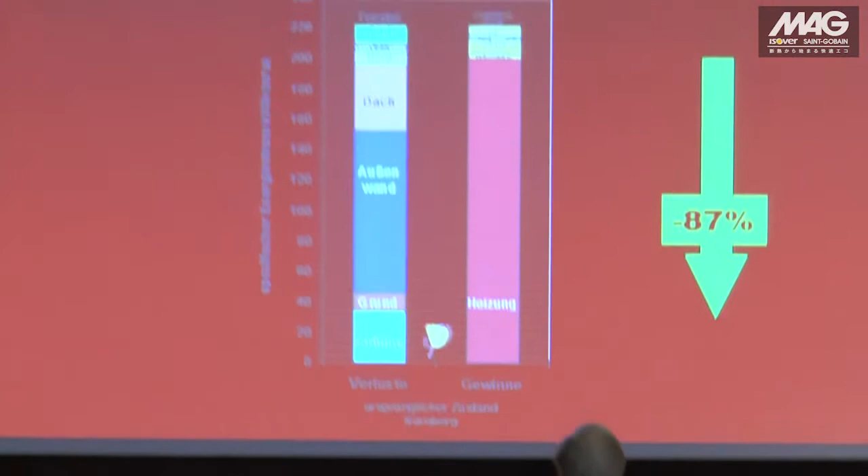So now you can go on and change the amount of insulation, change the window, change the size of the window, rotate the building and calculate it again. In this way, you can calculate for your house, and at the end it will be a passive house. This is a tool architects can use to improve their building designs.

You remember I've been talking about a famous European project called Cepheus. If you ask the European Commission, they'll tell you that was at least one of the most important projects ever financed by the European Union. And now we have another one called PASREG.

PASREG stands for Passive House Regions. These are beacon projects including cities you know: Frankfurt, Brussels, Heidelberg. Now what is common of these cities? Well, when you're traveling to Europe, you will visit these cities. You're in Heidelberg, you go to Frankfurt because it's the big airport, and you'll be in Brussels because it's the European capital. But there's something else common to these cities.

They already have passive house mandatory. So if you build a new building in Frankfurt, it has to be a passive house. And if you build a new building in Brussels from 2016 onwards, it will have to be a passive house. So this is already a beacon for what will happen in the whole European Union, beginning from 2019.

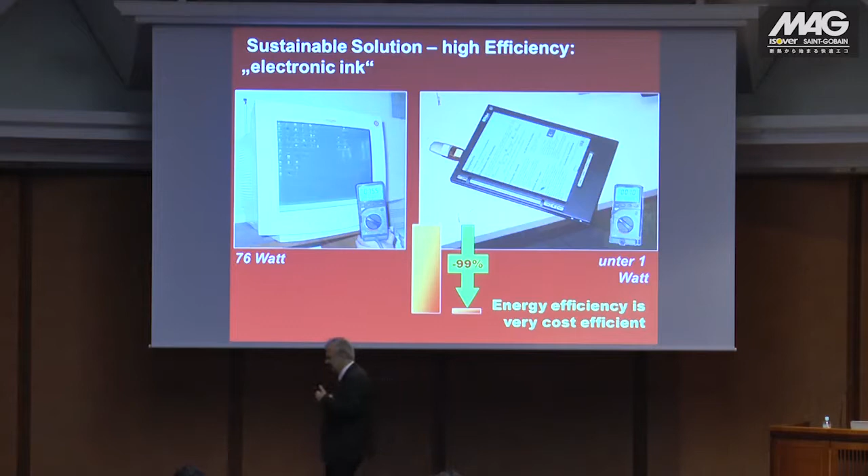Now there are, of course, much more details to energy efficiency than just housing. Energy for housing is quite high - it's the highest consumption we have. The heating and air conditioning systems have the highest consumption of all other things. But of course, computers are also consuming electricity. This is an old display with quite high energy consumption.

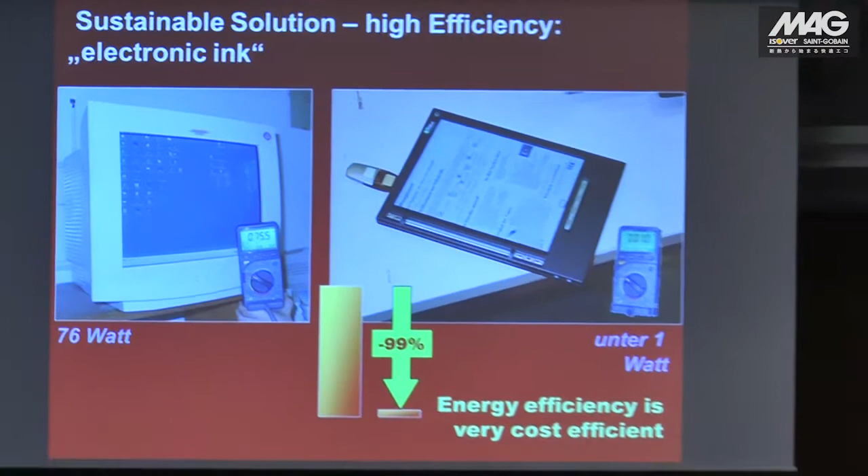The latest development we have is called electronic ink. Electronic ink doesn't consume any energy for the display. It's the same with your paper - I just want to show what is the energy consumption of that piece of paper displaying the picture on it. There's no energy consumption, and that's the same we have with electronic ink. The electronic ink screen doesn't consume energy.

So if you have an electronic ink reader, you can place it on your desk, and after two weeks it's still running and not consuming any energy. This is the modern way of reducing the energy demand of our systems, and that will work with everything.

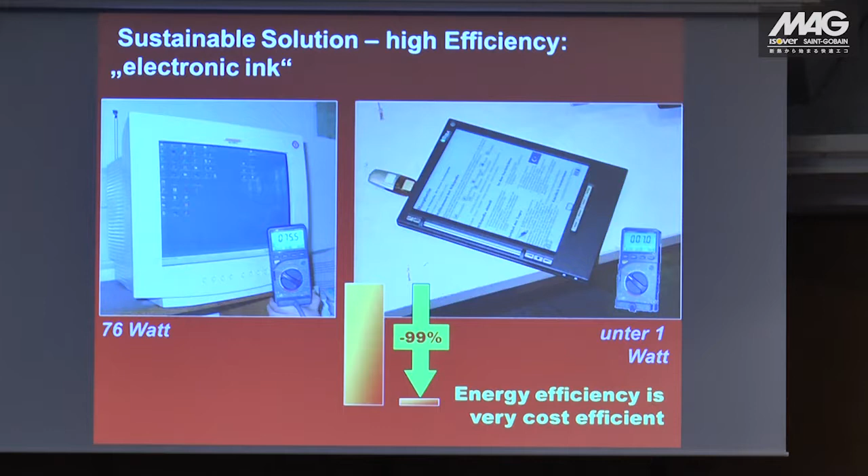Another example: this smartphone has a computer inside with much higher capacity than the computers me, Professor Bo Adamson, and Professor Kamata used to calculate the first passive houses. We can do all those calculations just with that smartphone, which consumes just 1 watt. So this is the real innovation going on, having highly energy efficient components.

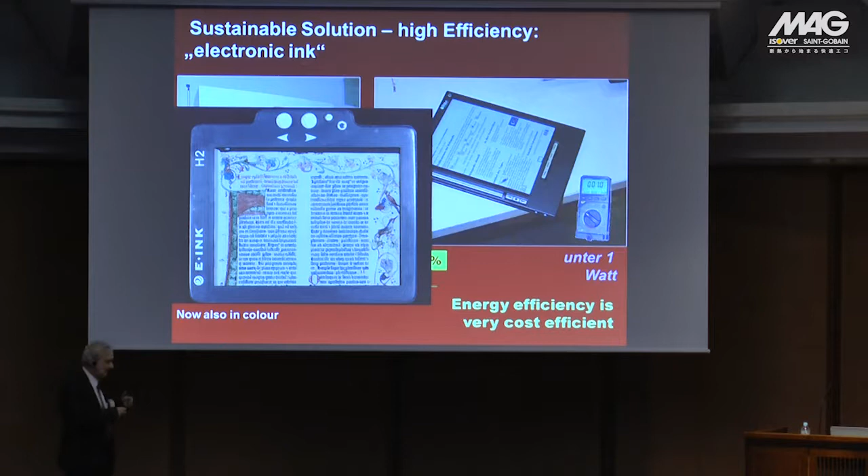Now some people say electronic ink is just black and white. No, that's not true - there are also color electronic ink systems. So that will be the upcoming next generation of displays using electronic ink without any energy consumption anymore.

What about the spread of passive houses? Some people ask, why is that being used in Germany only, and why isn't it also used in the US, which was supposed to be the most innovative country worldwide? Yes, it's true - the United States of America had a very good development in the late 70s and in the 80s towards sustainable energy.

There was an American president called Jimmy Carter. He very much engaged in sustainable energy development, and they built so-called super-insulated buildings. They just made one mistake, and I urge you not to do the same mistake: they were only dependent on governmental money. So in order to do that research, they needed governmental money. And then the government changed, from Jimmy Carter to Ronald Reagan, and he stopped the whole program. So all these people were out of jobs, out of profession, and that stopped the whole development in the United States of America. Some of these people came to Europe, like Robert Hastings, and worked together with the European part.

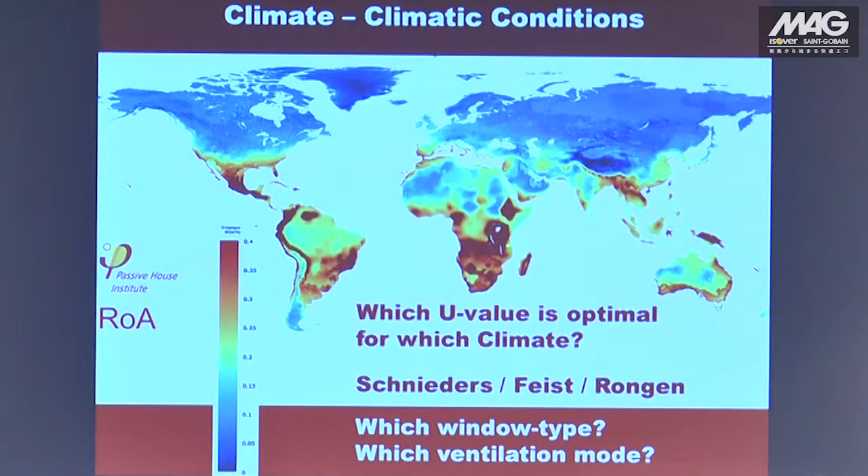So this world map is showing you the world in a bit of a different manner. It shows you how much insulation you need in order to build a passive house. You need a lot of insulation in Sweden, Norway, the Himalaya, the northern part of Japan, and you need almost no insulation in the highlands of Mexico, some parts of Africa - these are what we call the lucky climates. In these lucky climates, almost all buildings are passive houses anyhow, because you don't have to heat and you don't have to cool. Now, if it comes to some desert climates like the Sahara or the Arabic Desert, we need more insulation again, because we have to insulate against the heat coming in.

This was a result of a study financed by the German Foundation for the Environment, and they published it - you can look for this study on the internet, I will show you later where you can find it. So this gives you some ideas of what amount of insulation, for example, will be needed in the northern part of Japan, and more toward the Tokyo region. When you come to the southern part of Japan, there will be less insulation needed.

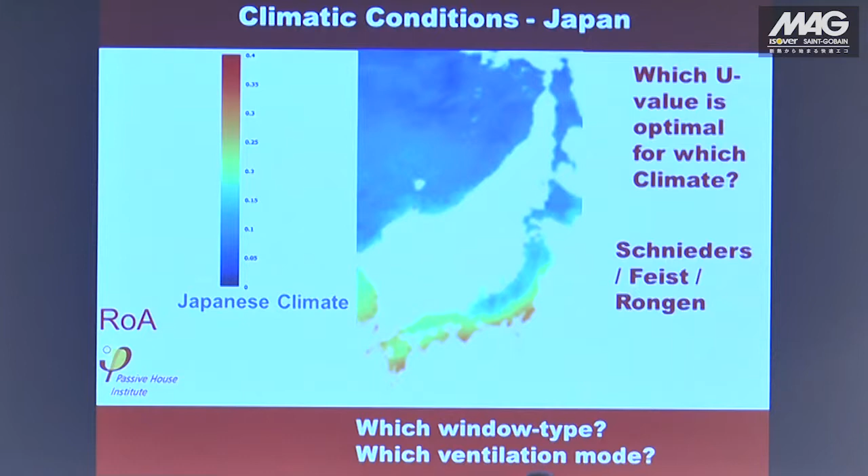We also looked at what is the appropriate window. In the cold regions, as I already told you, it may be a vacuum window - that's what's needed in northern Finland, northern parts of Norway, though not a lot of people live there, only a few hundred thousand in these very cold areas. Then there's a cold area covering northern Japan, northern China, middle parts of Sweden and Norway, the northern Midwest in the United States, and most states in Canada - there we need very well insulated triple pane, low-E windows, and even in some places quadruple pane windows. Then there are the moderate cold climates - most parts of northern Japan, Germany, England - these are where we have the crowded populations.

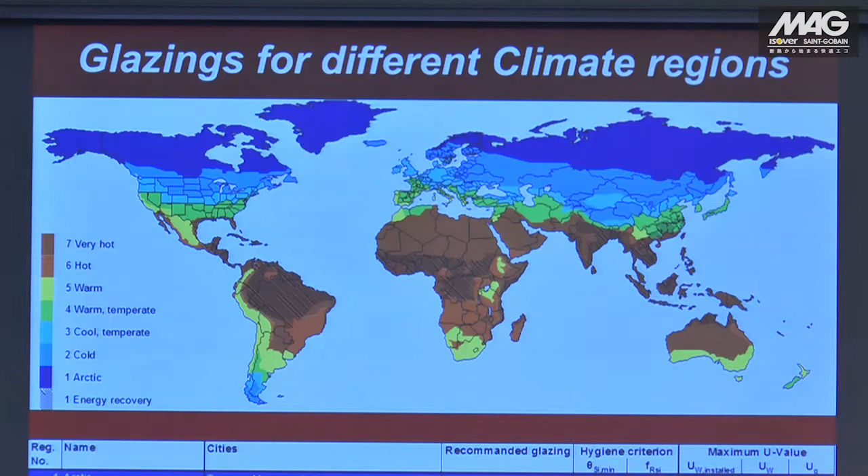There is a moderate warm climate, that's the rest of Japan, southern Europe, parts of Asia, and a lot of America. Then there are the hot climates and the lucky climates, the yellow ones, where it doesn't depend very much on the window. You can choose whatever you want, but you might need some shading. The wet climates are shown with parallel lines, so these are the climates where we also have to look for dehumidification. That's also part of this international study we have done.

Now, in order to spread the knowledge about the Passive House, there is an International Passive House Association. It gives information, communicates about passive houses, develops passive house educational material, organizes meetings, and so on. We really invite you to be part of that international development. Japan would be a very good partner in this overall development and network to spread Passive House knowledge. One thing the International Passive House Association does is create Passipedia.

In the Passipedia you find information for the public, just information like I gave you here. But of course, you have seen each of the slides I have had—I could have talked another hour on each one, on the details of the glazing, the frame, the ventilation system, and so on. So there is information you can just get from passipedia.org. There you find this information freely available for everybody.

Then there is a part two, that is a part for the architects, the engineers, the producers of material, which gives detailed information on how to solve specific problems—not of public interest, but needed by the architects. So this is for the members of the International Passive House Association.

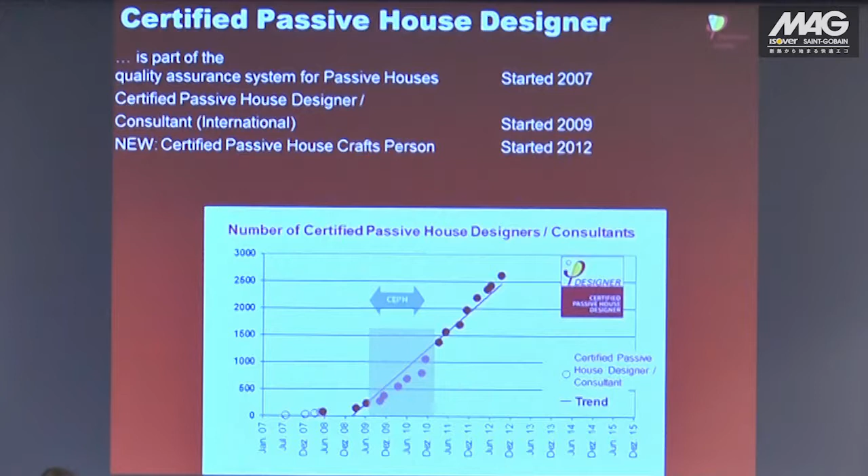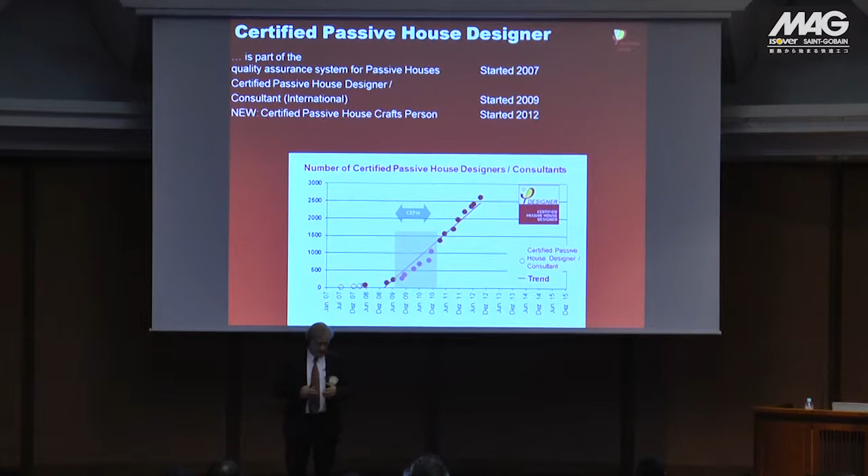We are also organizing educational courses. That started in 2008. Now most of you might think, why education? At the moment, your main task is to spread the knowledge, to just tell people that they can use passive houses. But I can tell you, from our experience in Germany, it will grow very fast. So in the next one to two upcoming years, you will lack people who are skilled to do that job. So you need more people skilled in that job, and you need to have education.

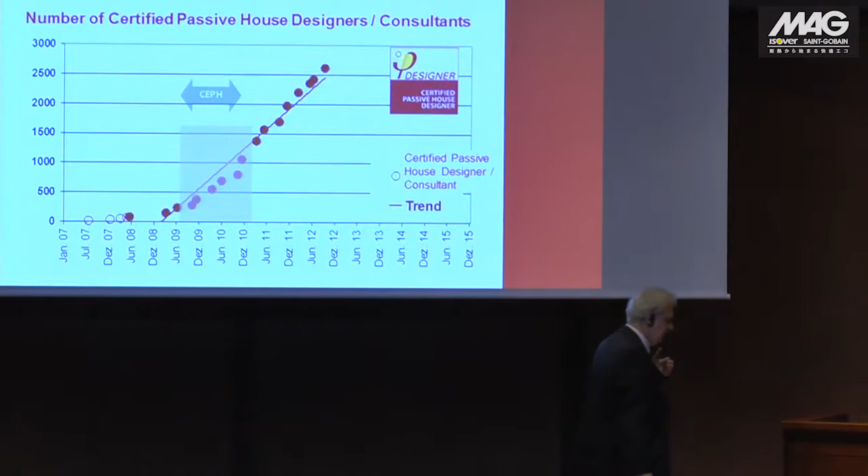The education should of course be at the universities also. We have a lot of university partners who are providing this education so that newly educated architects already know about it. But there also has to be professional education for those architects and engineers already in their job, and this is what we do with the International Association. So there is a growing number of educated passive house designers and consultants all around the world, taking place everywhere—in the United States, Mexico, Canada, Korea, and also in Japan. Miyamori will talk about that later.

So this is my last slide, and yeah, that is what professors seem to do—they talk a long time, so that's now my last slide. So you can have your coffee after that slide.

I'm just telling you one of the other activities we are doing next week. End of next week, there is the International Passive House Conference—already the 18th International Passive House Conference. This time it takes place in Aachen. Aachen was, some 1,200 years ago, the capital of Europe, in the time of Charlemagne, the big emperor who ruled all over Europe. The Aachen people are still proud that they were the former capital of Europe.